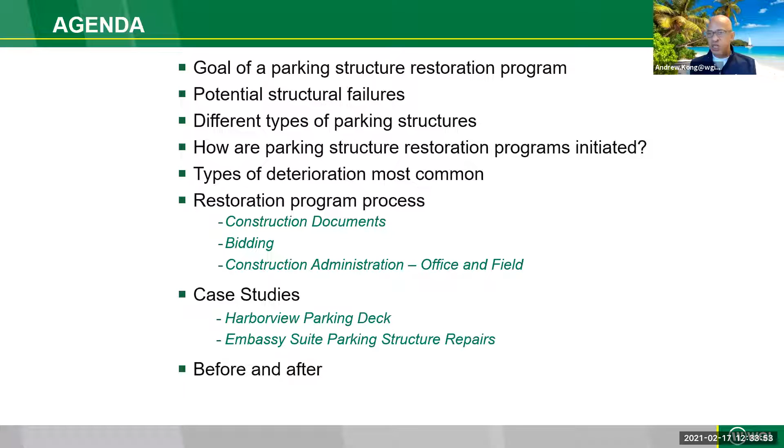We'll talk through a little bit the common types of deterioration that exist in most parking structures when we get involved, what we do from that point in terms of developing a restoration program from construction through administration, and then we'll share a couple case studies to highlight what the process looks like, and then some before and after of different types of repair that we've been involved with. Those before and after may include projects outside of just parking structures.

Again, our main goal here when we do a parking structure restoration program is to make sure the structure remains serviceable. So that's kind of our overall goal. We don't want the structures to get to a point where you're going to have major failure. So that's the whole idea of us getting involved and doing this. The next few slides that Juan is going to talk through will highlight some failures in parking structures that we try to prevent in terms of when we develop our restoration programs.

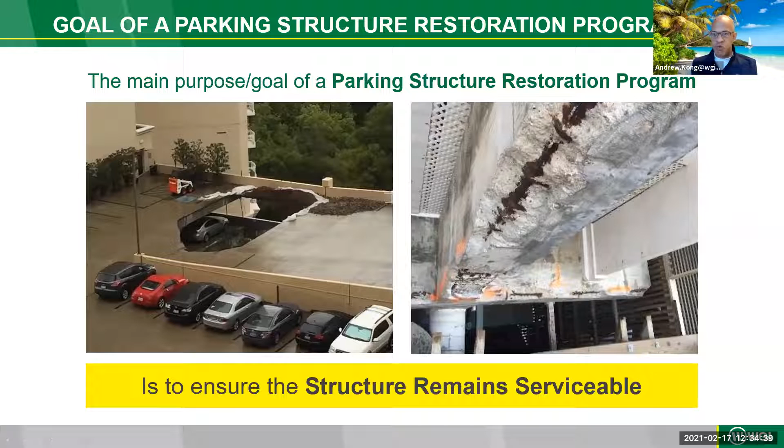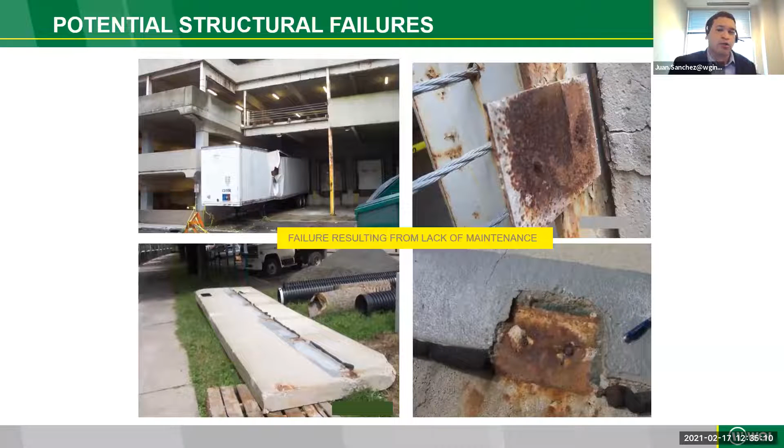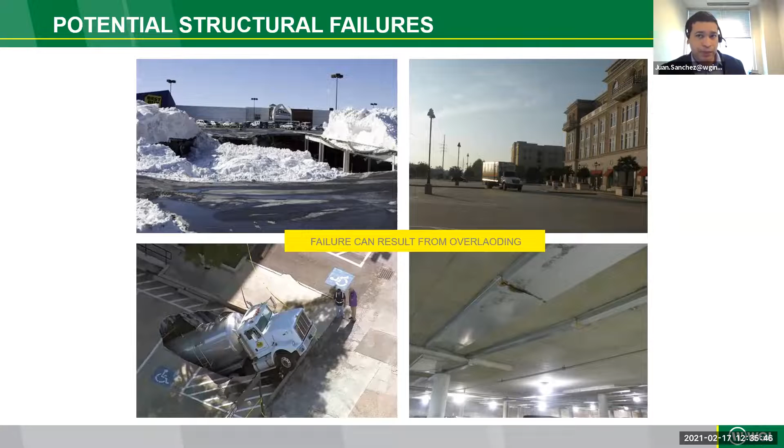We can also have failures resulting from overload in the structure. Again, here we have some extreme examples. The picture on the top left shows accumulated snow, very high, which led to the failure of the structure. On the bottom left, you can see a tanker truck that overloaded a parking structure. The picture on the top right is similar - the structure was being overloaded by a food delivery truck. Again, it's a parking structure.

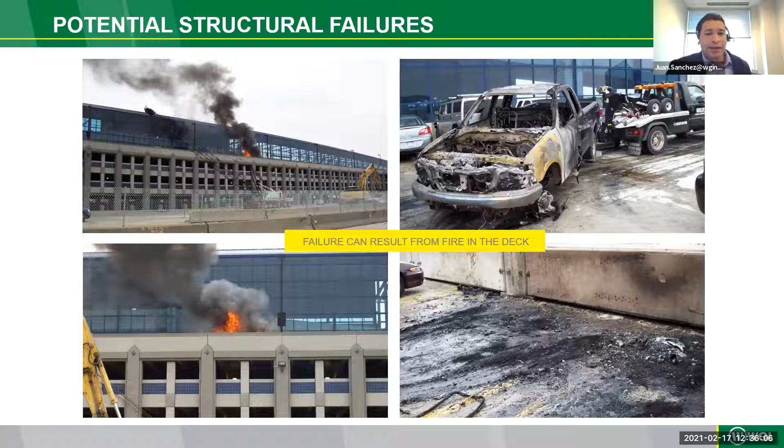Failures can also occur due to fires. Basically, when concrete and steel receive high temperatures, the yield strength of the steel and the compressive strength of the concrete are reduced, and this is an inelastic process. Basically, the reduction in strength is permanent.

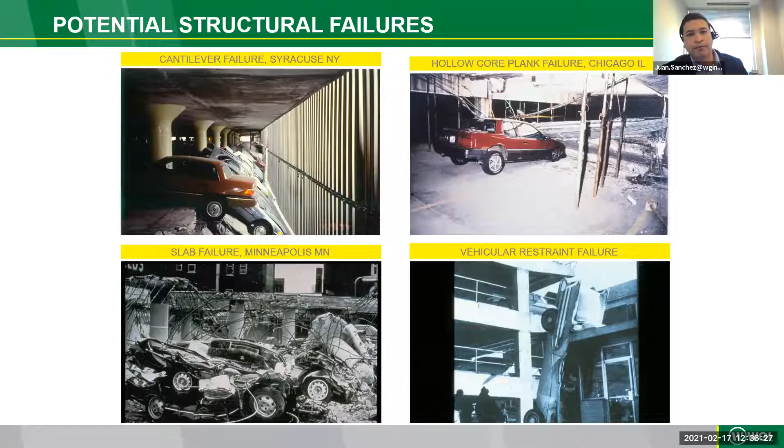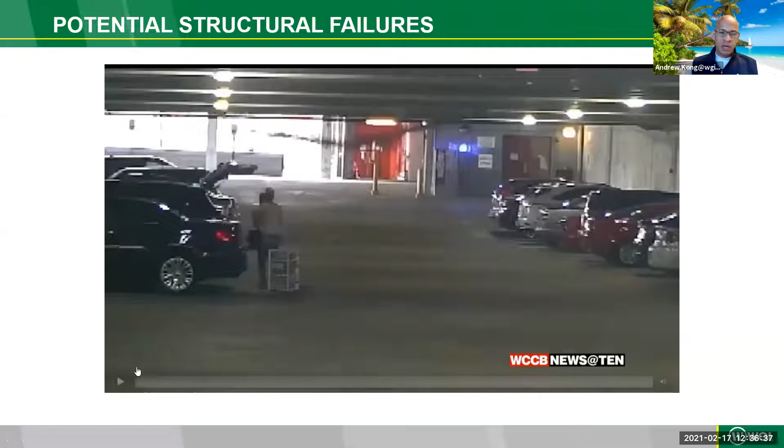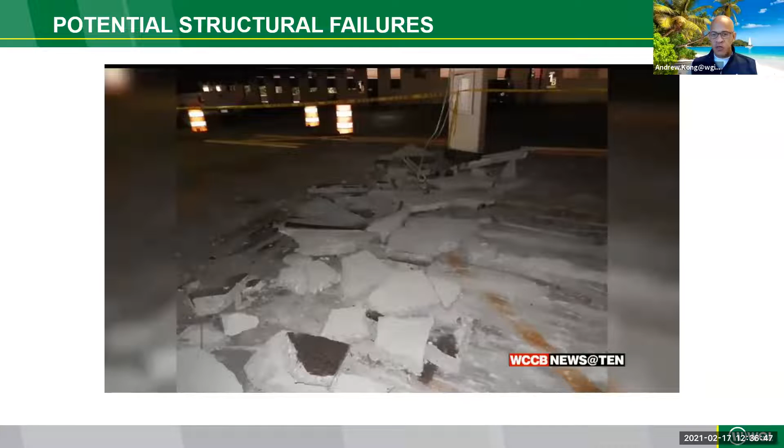Just to continue on some of these extreme failures, and extreme doesn't mean that they likely won't happen. In this scenario, consider standing in a parking deck and the section of the floor falls through right where you are. Those are things that when we go and do these assessments, we're looking for.

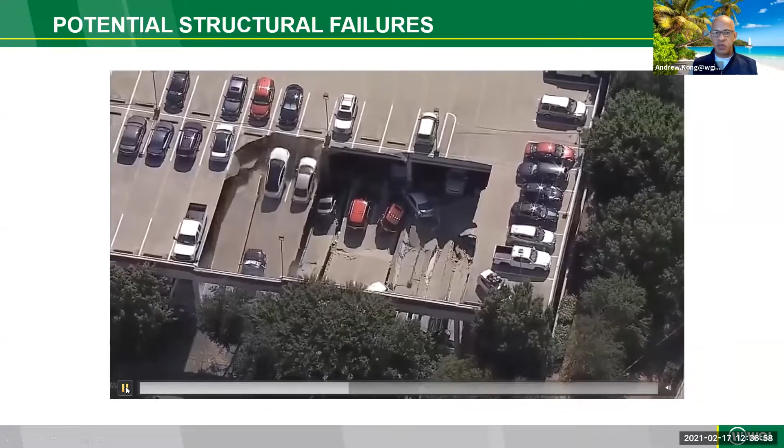Another extreme case here, I think it was 2 years ago in Texas, where this parking structure, you can see, I can't imagine you're sitting in your car and the floor of the garage falls out. I can't imagine. But what it tells us is how much effort and intensity we need when we get into the structure, thinking about what we need to do to make sure we can cover as much as we can to eliminate issues like this from happening.

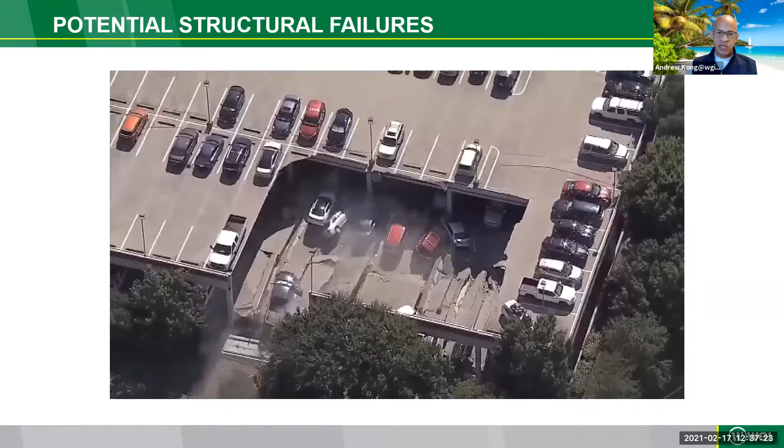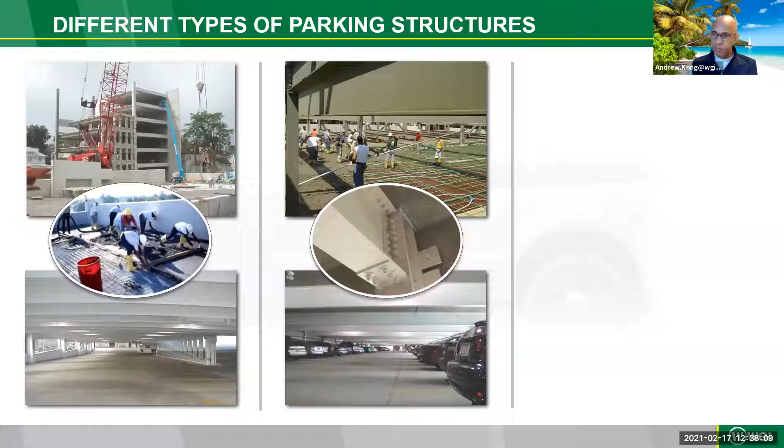The next category are steel parking structures. Beams and columns are made out of steel, but typically the driving surfaces are cast in place, and they could be conventionally reinforced, or they could have a combination of conventionally reinforced and PT cables.

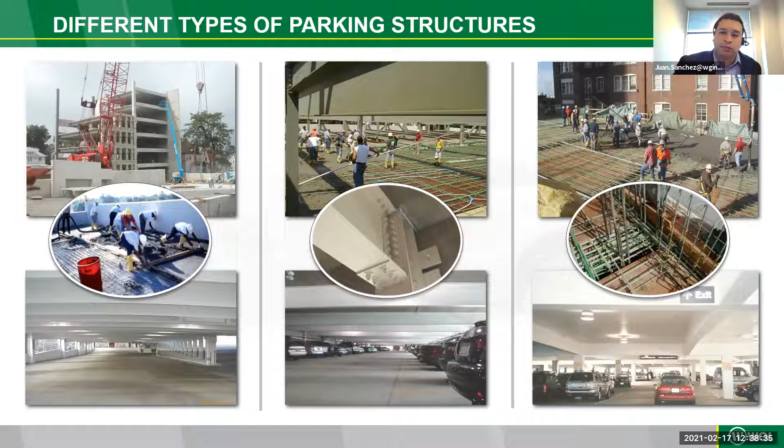The last general category for a parking structure are cast in place parking structures. Some of the older structures are conventionally reinforced, and the newer structures have a combination of conventionally reinforced and post-tension cables on the driving surface.

The main reason we've highlighted the different types of parking structure, as Juan alluded to earlier, is because we want to get to this point: not all parking structures are equal, right? So as they say, unfortunately, you get what you pay for.

In most cases, as Juan alluded to, we have different, common types of parking structures that we deal with. Here we're highlighting some important aspects when you start thinking about designing and implementing a new parking structure. You've got to think about the quality of construction and the maintenance that's required.

Same thing is true in the post-tensioned structure. The initial cost for the structure is much higher, but in terms of maintenance it's much lower, and in terms of life expectancy it's much higher.

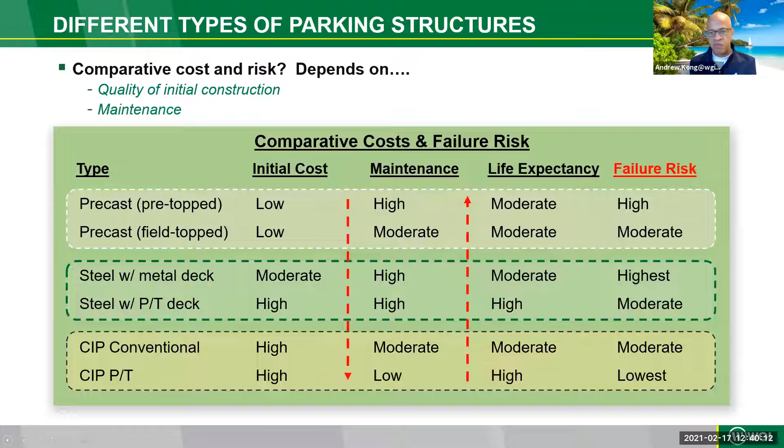That's the key, and unfortunately, a lot of times we'll get into a scenario where folks build the lower end structure, but they don't accommodate enough money for maintenance and understanding what the likely outcome can be if they run into deferred maintenance. This table is just to show you that you spend more upfront in order to spend a little bit less in terms of long-term maintenance of the structure.

So why, how do these parking structure restoration programs get initiated? What we've derived is usually from 3 different scenarios.

A lot of times we'll get called for assisting clients with developing due diligence, whether they're selling or acquiring new properties, or just normal routine for a client that wants to do yearly or typical engineering condition assessments of their structures. The other scenario is when things fall apart in the garage and they have issues, and they call us in to say, hey, we need help with these items. So typically that's where we start a lot of times.

If we develop these reports, or we get called in because there's an issue in the garage, they need assistance with developing a repair program. So the other part of the coin is who should be completing these reviews and inspections. In terms of routine maintenance, that can be done in-house by the client's staff who understands what they're looking at, or by contractors.

But as it pertains to structural and waterproofing, life safety, that should be done by qualified individuals, a firm that has individuals that understand how these structures behave. With parking structures, you can't fix what you don't know how it's developed and how it's going to behave. And if you don't have training and experience in understanding how it was constructed, how it was designed and how it should behave, then it's hard to diagnose the issues and how you address that.

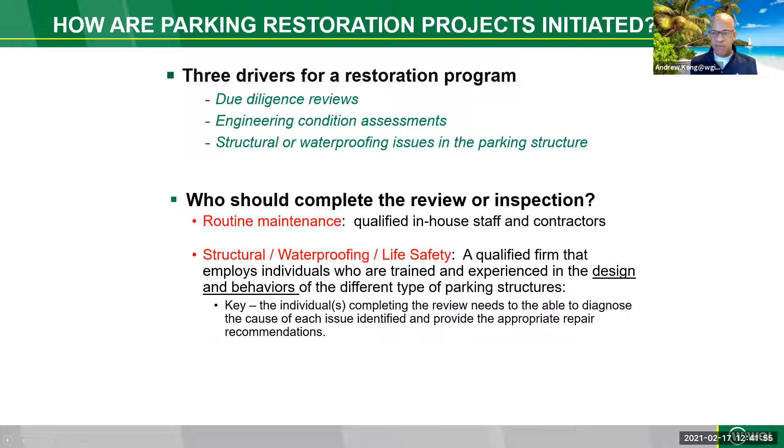So as far as that's concerned, you need individuals that are trained and experienced. When we put together a repair program, it's typically laid out in 4 areas: items that are considered not compliant, code compliant items like ADA guardrails, and then most of the main items we deal with are structural repair items, whether it's concrete, slabs, beams, vehicular guardrails, stuff like that. Then waterproofing items, sealant, deck coating, expansion joints, plaza system, and then a category we separate as miscellaneous. It's not a complete list, but it's how we pocket the different types of items into our repair program.

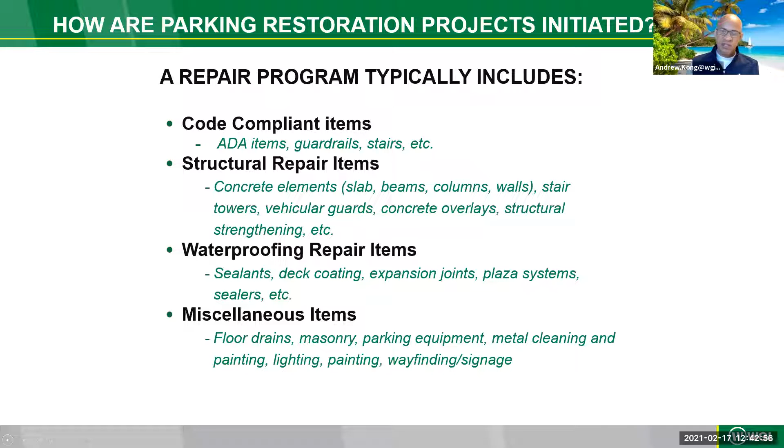So the next step is, Juan will take you through some of the typical deterioration that exists in us developing these programs. Parking structures are typically open or partially open, and therefore exposed to the weather, and this exposure leads to a more rapid rate of deterioration. Some of these pictures are showing that.

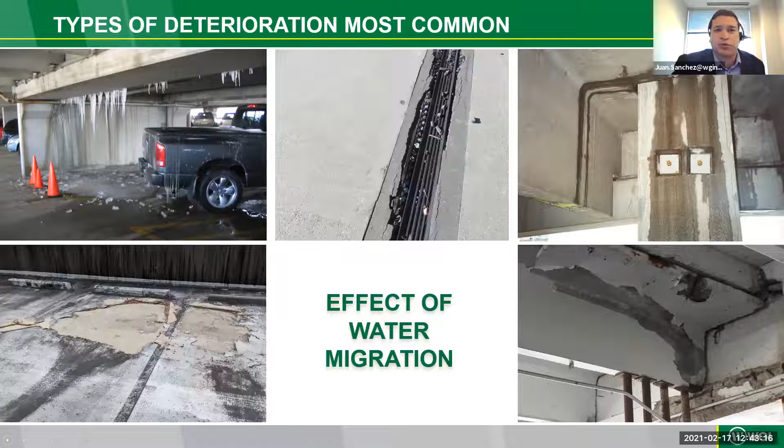Water, sometimes mixed with de-icing salts, gets through cracks in the concrete and reaches the reinforcing steel. The reinforcing steel then expands, and this expansive force spalls the surrounding concrete. Here are some good examples of concrete spalling due to the reinforcing steel expanding and corroding.

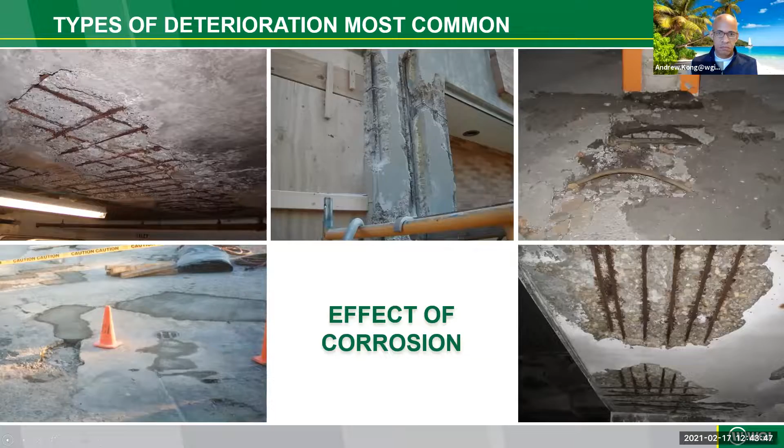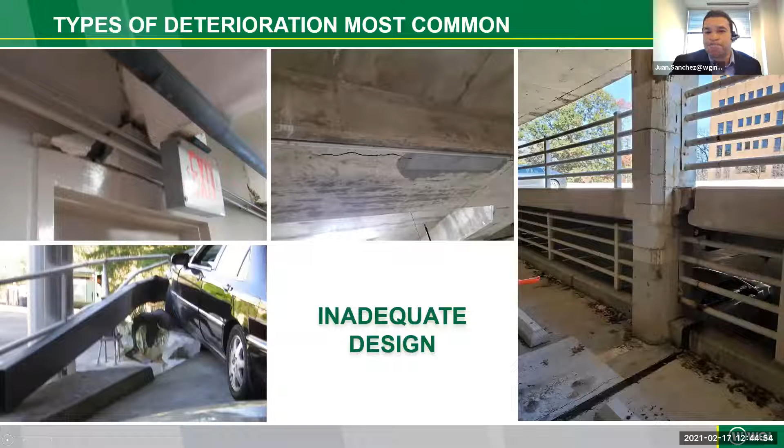All right, so those are some of the common distress that people will see, and again those are not all inclusive. We just identify those because a lot of times those are most common that folks will see in their garage and understand that, hey, we have an issue.

So with that being said, once we get pulled in to determine what's going on with these parking structures, we identify the items that need to be addressed by the client or whoever the stakeholder is. They'll ask us to put together a program to address certain items based on whatever their capital budgets are, and depending on what's considered immediate or long-term.

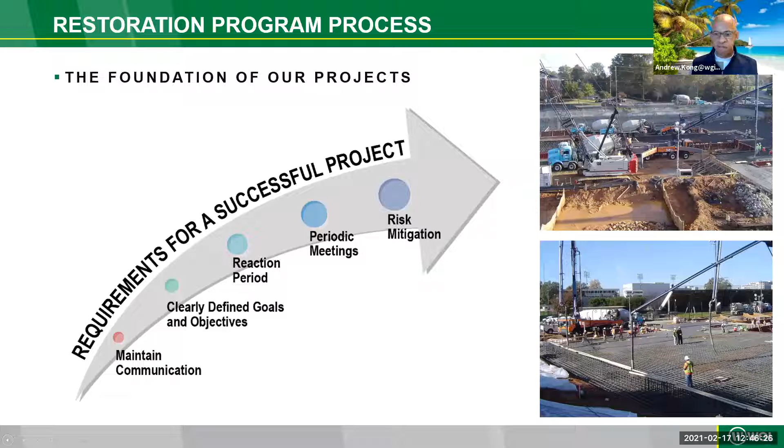Before we even get started, once we get engaged, the first thing we do as a firm is sit down and go through the foundations of what will make our project successful. Here we've highlighted some of the requirements that drive a successful project - key bullet items like maintaining communication, setting clear defined goals and objectives, setting our reaction time, establishing periodic meetings, and figuring how we mitigate the different risks that may be involved in the project, because all these projects are unique and different. No restoration project is ever the same - they may have similar types of repair programs, but they're never the same.

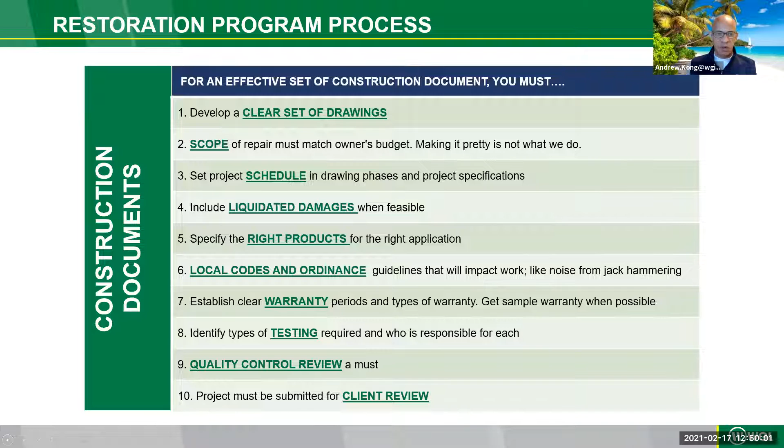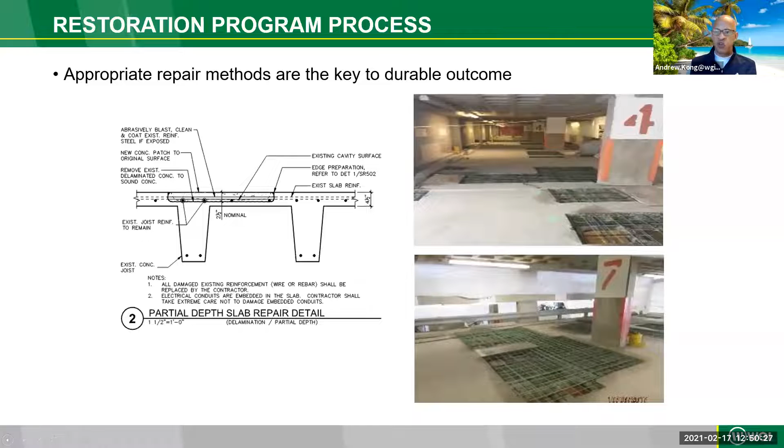And part of having a good set of documents, as they say, the devil is in the detail. So make sure you have the right detail for the right application. Here we're just showing a partial depth slab repair detail, and on the right side we're showing how that's executed, making sure things are square cut, the right reinforcement is going back, the right depth is achieved, because you're trying to establish something in terms of long term.

And then we talk a little bit about phasing. In most parking structures, it's quite rare when you get a large amount of space, because a lot of these structures are revenue generating. So you have a limited number of spaces, whether it's 100 out of 1,000 spaces you got to work with. You have to have a way of telling the contractor how to move around to create a safe environment for them to do the work, and figure out the most efficient way versus their duration. So having a good phasing plan is critical to the outcome of your project.

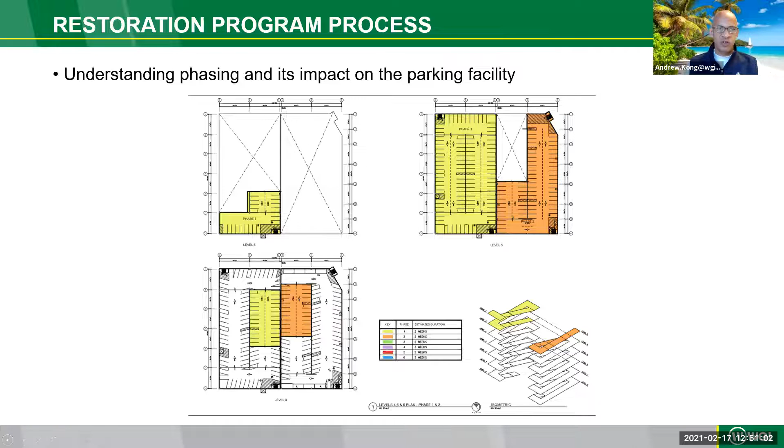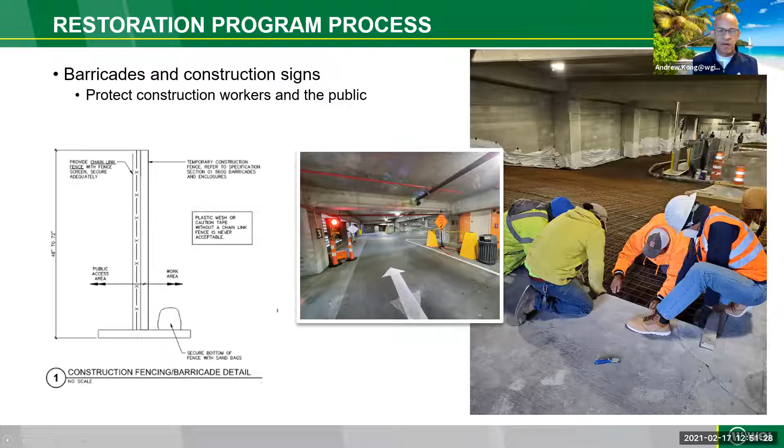And here again, as part of your document, you need to highlight what are the safety constraints. Safety is on the contractor, but you need to define what those minimum requirements at least need to be. So here we have details for how they should set up their barricades. This structure here, we actually have temporary lights in the garage to help with traffic control as part of the barricade and signage.

And so once you've established the construction documents, the next thing is to find qualified contractors. That's the key. So in bidding, you need to make sure that you select the right contractor that understands or has the capability to do that kind of work. On the private side, we have a lot of leverage in doing that. On the public side, not so much. But if you have a good set of documents, the same should apply. Give these contractors enough time to put together a reasonable bid.

So at the end of the day, you get a bid that you can really understand what's being asked or provided. Where possible, have a pre-bid conference, make it mandatory, so you can explain what the expectations are and go over the drawing so everybody can see here's what we're trying to do, here's what we're asking you to do. So there's limited questions.

And at the end of the day, once you get the bids back from the contractors, make sure you create a bid comparison spreadsheet to look at all the numbers in line with each other, to see where there is any deviation, so you can go back and question whether or not a price is too low or too high, to get the mindset of what the contractor is thinking.

Because sometimes people make mistakes. They may assume something that's not really the intent. And make sure the math works out, because sometimes folks are speeding up to get their bids in, and they may miss a number, and you don't want to penalize them for that.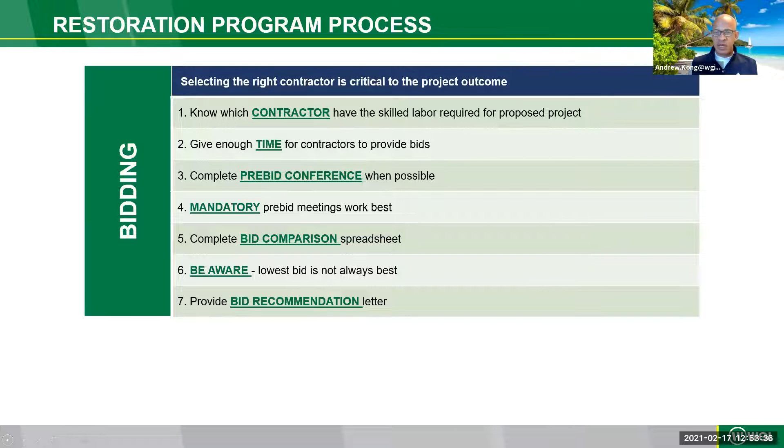And the last piece of a restoration program is the construction administration. I think in my opinion, this is one of the more challenging pieces, because the facility is in service, you're dealing with old structures. Usually there's a lack of existing documents, and there's always unforeseen conditions.

So for a successful construction administration process, your restoration consultant should always have a role in construction administration, should have a heavy role, and should be as involved as possible. Now, there are some limitations, because we need to be aware of the scope and the schedule. Depending on the complexity of the project, there will be a number of site visits. More complicated projects, we need more site visits. Easier projects, not so much.

And then to accomplish this, we need to set the expectations early, have clear communication, and have a pre-construction meeting. Usually I like to set my expectations early by requesting contractors to do mock-ups of all the repair items. And then that way we can agree to an acceptable criteria.

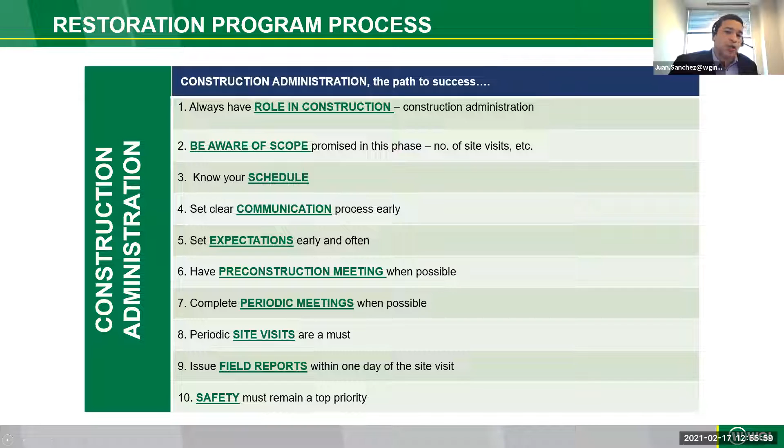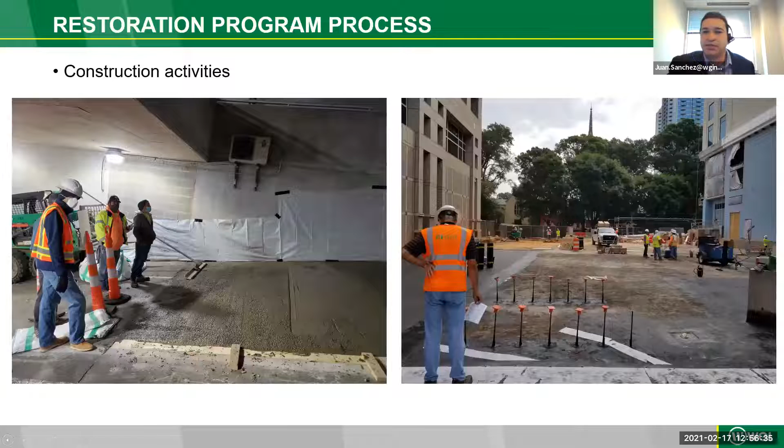We're also there making sure that we can answer questions, checking elevation, dictating where tool joints go. We do have, there's usually a special inspector involved that works for the owner, but they have a different role. We're just there to kind of answer questions and make sure that things go according to our contract documents.

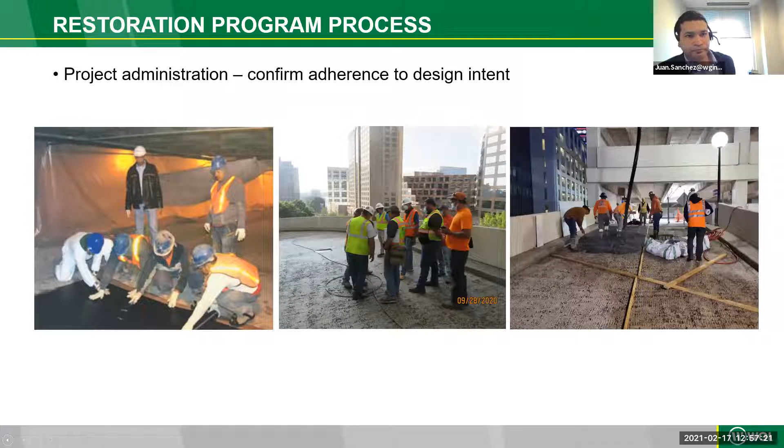And then now I'm going to do a small case study for one specific issue. So this is Harborview parking structure. This was constructed in 1980. It's a field topped precast parking deck. It has 5 levels. We were tasked by the owner to retrofit the vehicular and the pedestrian guardrails. There were some other miscellaneous items that we worked on. One of the major constraints was that the structure was in service during the repair process.

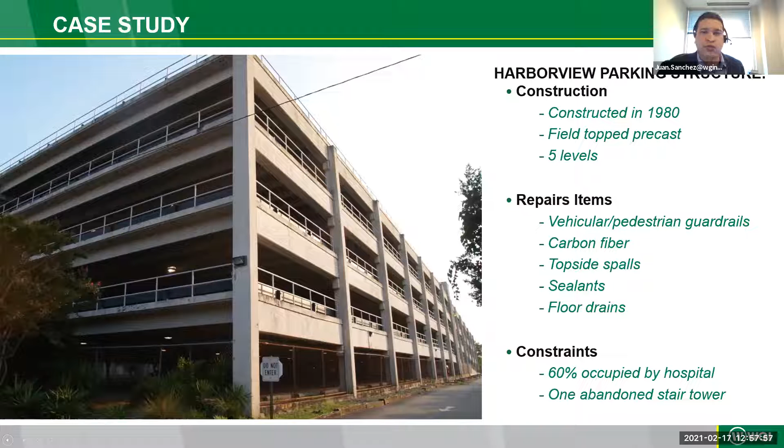So as I mentioned earlier, we were tasked to retrofit the existing guardrail system. You can see the existing system in these pictures. Initially the system looks very robust, but looks can be deceiving.

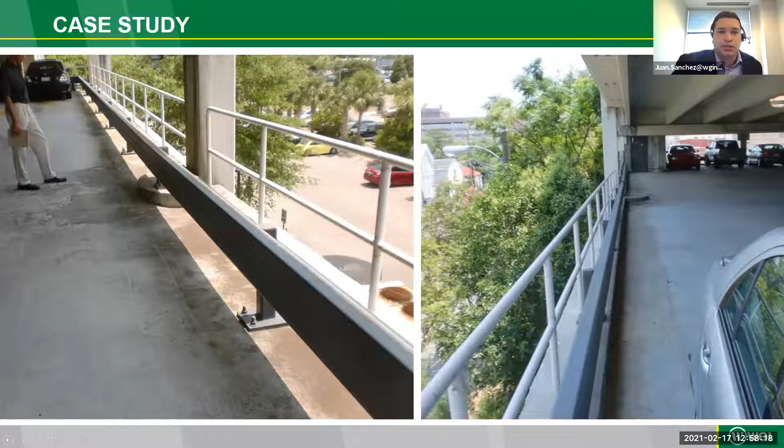On the next picture, case in point, the guardrail was tested. One of the patrons in the garage suffered a heart attack and hit the accelerator instead of the brake, putting the guardrail to the test. As you can see, although the guardrail stopped the car from falling off the structure, it did a poor job and did not act as it should have, as intended or as required.

If you go back to the previous slide, you can see the failure happened at the edge, and you can't see any type of reinforcement tying the curb back to the double T's. It was almost like a clean cut.

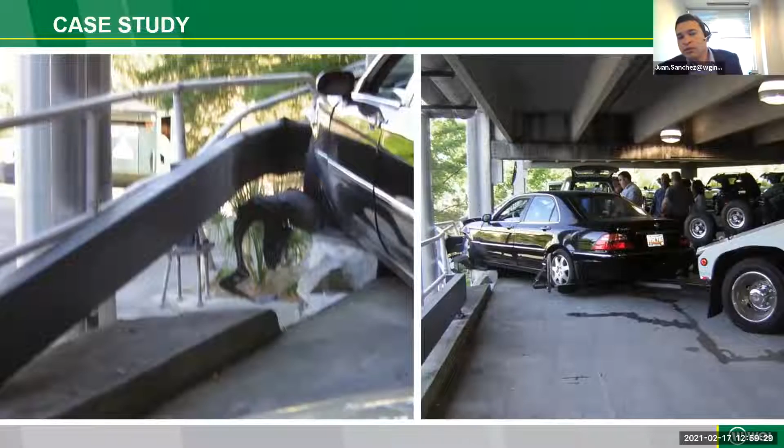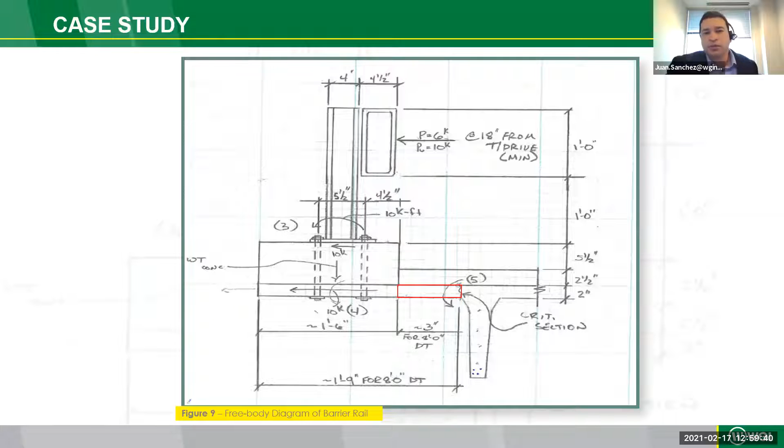So during the retrofit, this is one simple detail, but there's different ways of addressing this. Our goal was to complete the load path, so we transferred the loads through a series of plates and brackets from the barrier above to the double T's.

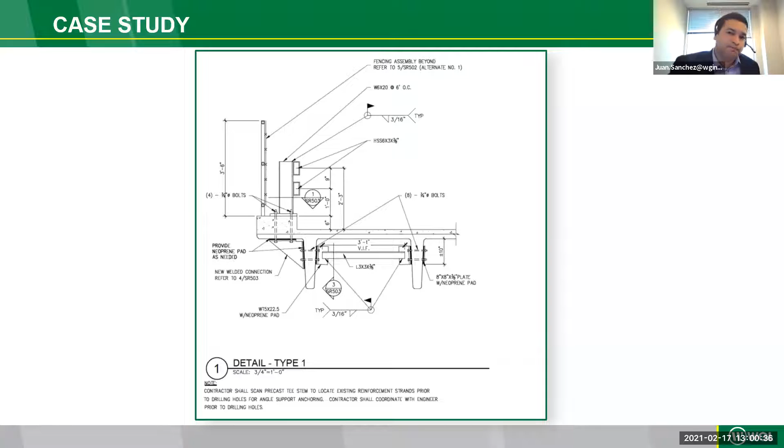Some of the challenge is, for example, these double T's have cables, so you need a qualified firm or qualified individuals that can assist the contractor and tell them where there's no cables so you can drill. You need a qualified firm that has expertise in precast structures, steel elements, and carbon fiber repairs.

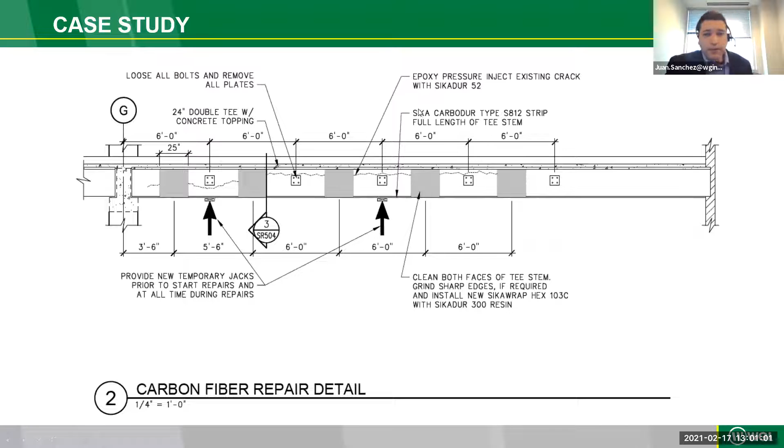If you look at this next slide, the double T's were damaged during the accident, so we had to epoxy inject the cracks and strengthen the double T's with carbon fiber. The gray hatches you see are the carbon fiber reinforcement. On the bottom, it's kind of hard to see, but there are carbon fiber plates also used to strengthen the double T's in flexure.

Here's an after picture. On the left you can see the carbon fiber, the black elements wrapping around the double T's. You can barely see any cracks because we epoxy injected those. On the bottom it's a little hard to see, but there's the carbon fiber plates to strengthen the T's for flexure, and the new brackets that were put in.

We had to check the double T's for punching shear. This was a bit of a challenge because there weren't any existing drawings, so we had to rely on our experience to check the double T's. In the picture on the right, you can see the new pedestrian black railing and the new vehicular rail that we put in at all levels of the parking deck.

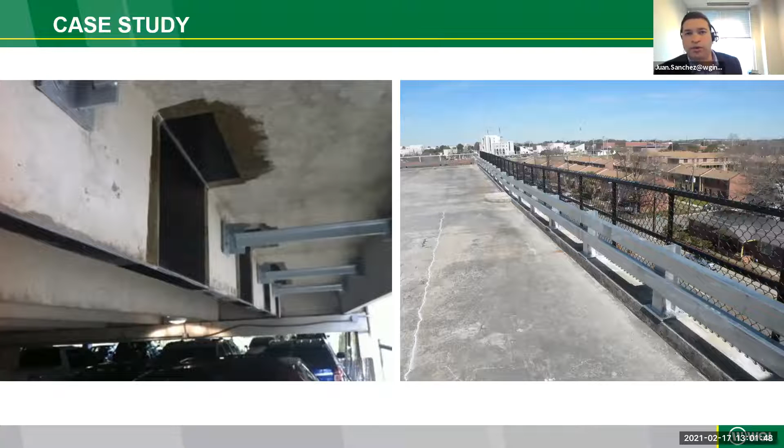Okay, so that's the first case study, and the goal here is to highlight the complexity of parking structures. For folks who design, repair, or work in parking structures, we know they can be very complicated. So the thought we came up with when we talked about the previous case study that Juan highlighted is, let's talk about a deck that's above grade.

Let's talk about a deck that's precast, and the different elements. So Juan just talked through an above grade precast parking structure. Now we want to talk about a below grade, subterranean parking structure that's below a hotel.

So we're looking here at the Embassy Suites parking deck. You can see the structure was constructed in the 60s and conventionally reinforced. We have 4 levels. So here you're in a large city with tight constrained spaces, and you have 4 levels of heavily deteriorated parking structure below 28 floors of hotel.

And what this goes back to is, before we started talking about the construction documents, we really talked about the foundation of what makes our project successful. And these projects are the ones that really drive that home.

We have an active hotel with 28 floors above a structure that's heavily deteriorated. How are we going to make sure we implement a repair system that's going to create the least inconvenience to the folks occupying the hotel, and what's going to be the most structurally sound type of repair? So we just couldn't go in and demo concrete willy-nilly. It just wouldn't work. We couldn't use jackhammers because the vibration and the noise would just be hell for the guests to pay.

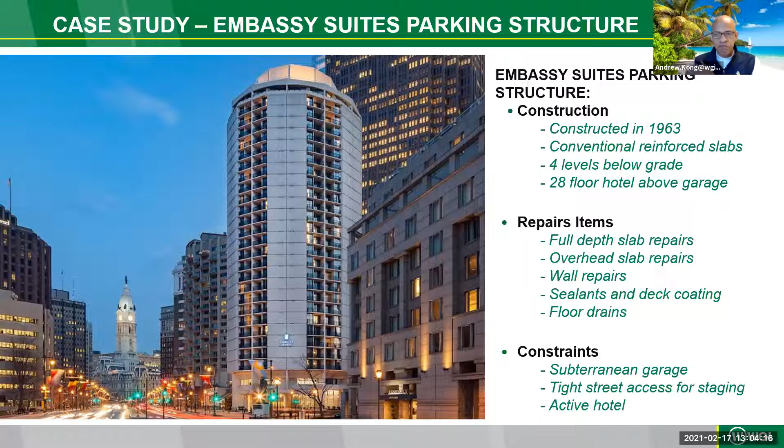Here we're just looking at some of the different types of distress. This garage, again, deferred maintenance has put it in a position where things were, actually, to a point where you're like, oh my goodness, it's hard to see myself parking in that garage. The floors, the concrete, you can take up with your hands. The level of section loss was so extensive.

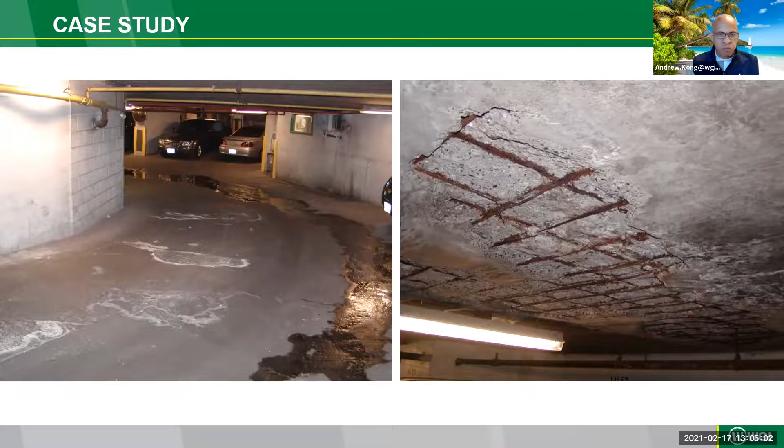But that's what we do. We go in, we were called in to investigate these issues and figure out a way to get them addressed while keeping the facilities in service. Our thought here is, what do we do? How do we fix this, and what's going to be the process? So what we ended up doing here is we decided we can't jackhammer.

It's going to be too much noise. So we implemented going with Hydro Demolition. In the Hydro process, you're using high water pressure to cut the concrete. You put high water pressure on, push it up close to whatever the compressive strength of the concrete is, and all the bad concrete, it takes up all the bad stuff.

The bad part about that is when you're using all that water, and because our garage is going 4 levels below grade, everything is running down, so how do you capture the water? Because of the requirements by the city, we had a vacuum truck tied to the Hydro Demolition machine that sucks up the slurry, because we just could not capture it on the deck and put it into a landfill. It had to be sent to a specialized location because of the contamination.

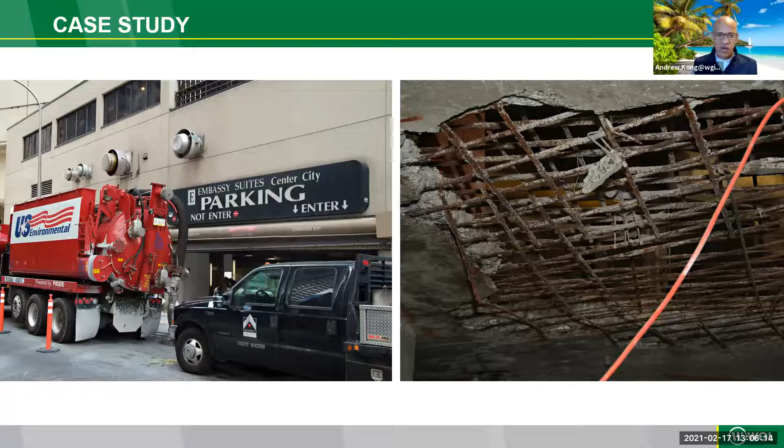So what you're looking at on the left is a vacuum truck that is sucking up all that slurry being produced by the Hydro Dem machine, and then that's taken to an off-site location where it can be safely disposed of. On the right you can see the machine cutting, and right behind it is the hose attachment to the truck that's sucking up as much of that disposed material as possible. But you can only capture so much.

So what happens with the water? Now, because we're 4 levels below grade, how do we get the waste and the water that's being produced, and how do we dispose of that safely? One thing that's typical for most hydro type repair approaches is you have to capture that water, treat the slurry that's being produced, and test it for the adequate pH levels.

So what we did is we constructed these containers in the lower level of the structure, at the lowest level on grade, because it's going to be a lot of weight. We captured all that slurry as much as possible in those containment tanks, the sediment settles, and the water at the top goes into the other tank, and then it's tested for the level of pH, and then it's pumped into the pump room down there and pumped up to the city main so we can adequately dispose of it.

These projects are very complicated because you have a lot of moving parts. The hotel, the core of the hotel, where the garage surrounded an active area for laundry and all that stuff. So we had to make paths for folks going in and out, and paths for how they dispose of their garbage from the hotel. On a few occasions, sprinkler pipes were knocked off because it's a sprinklered garage, and then the fire department shows up and you empty the hotel.

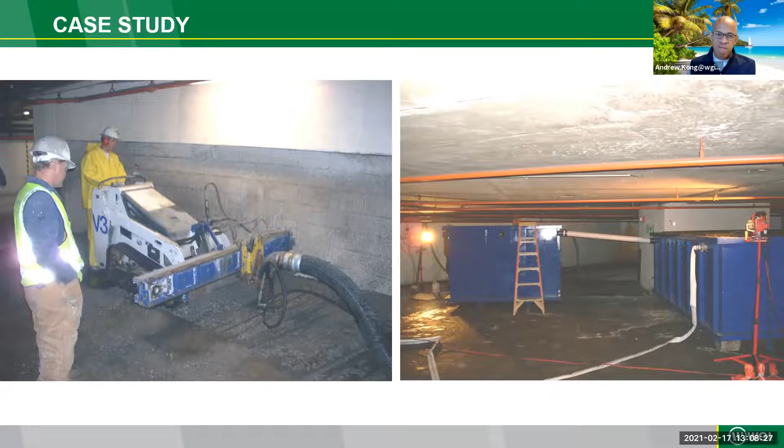Now you're looking at the extent of bad concrete that has been removed. You see these big holes in the floor. We had shoring underneath because the core, the entire slab itself is tied in as part of the core and is part of the entire structure. So we had to be very careful about the limits of what we can remove at any given time in the garage, and make sure things are adequately braced and shored.

Because the concrete is so bad, once they shot blast, it just comes up. You can see on the left, we have some small pieces of concrete left in place. Usually at the end, we just go and knock out all that bad stuff because it does us no good. Then on the right, we go back forming the entire thing and embedding into the existing structure, and we go back with epoxy coated rebars.

Even with the simple thinking of using epoxy coated rebar, we have to be careful, because when you cut those rebars, you've got to make sure you treat the ends and stuff like that. So there's a lot of design. We couldn't just throw back bars to match bars. We had to make sure we do some analysis in terms of figuring out how much reinforcement needs to be replaced versus how much reinforcement we've lost.

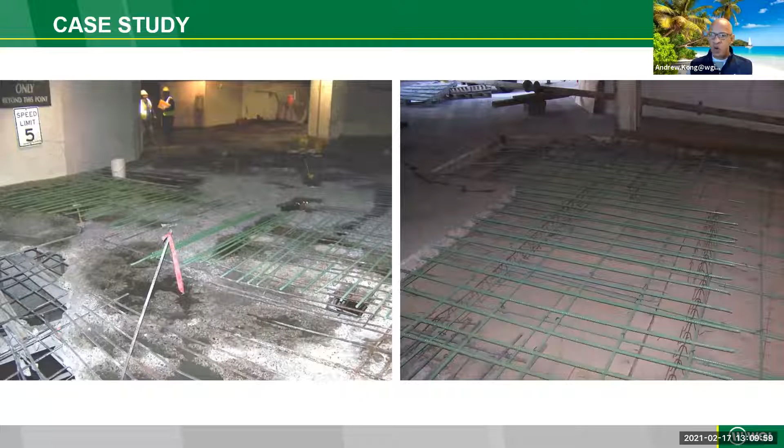These repair programs can be very complicated, and a lot of times from the outside, folks don't really see that in terms of the engineering. The contractors, most of them, know because they've done this many times, what the expectations are when you get into these complicated projects.

And at the end, this is what it looks like. It turned out to be a very successful project, and created a safe environment. Before, it was like, you wouldn't want to park there, but this is what we do.

A lot of times we get called in for scenarios where it's hard to just get somebody to go in there and willy-nilly try to patch here and there. But at the end of the day, a big part of why we get to where we get to is deferred maintenance, where enough money is not allocated by the asset owner or whoever's managing the asset to address some of these issues before they get to this point. If you don't spend and address the issue, then it's going to be cumulative, and the scale is going to go pretty high.

So we've kind of showcased this, and again, our goal here is just to give you a snippet of how we think about what we do and how we do what we do. We can spend hours and hours talking through the nuances and the different types of what we do, but hopefully this gives you an idea.

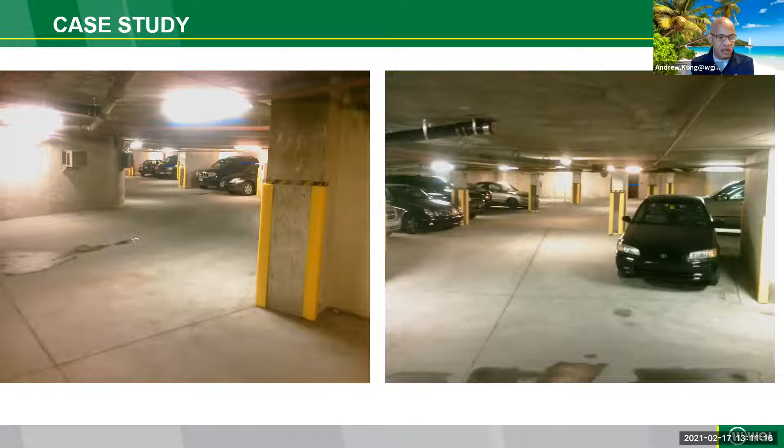So the next set of slides are just some before and afters, highlighting segments of different parts of different projects, just to give you a flavor for how things move from being distressed to a part where you address it.

Here on the left, those two photos show the existing condition of the garage, and we were going to put a silane, a penetrating sealer, which penetrates the top of the concrete to help keep water and moisture away from the reinforcement. You can see the middle photos, that's where the shot blasting happened. You can see the difference with the cleaning, how nice it looks, opening up the pores so they can put a sealer on and then replace all the sealants, and it turned out real nice. So that's just a sealer application there.

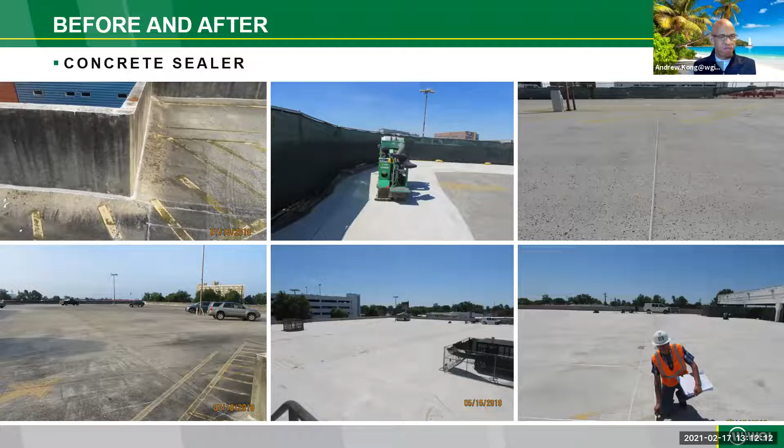Here we're trying to highlight some of the uniqueness of how we think about these items. In the middle photo there's a metal plate separating two garages that we combined into one functionally. They were independently functioning garages, and we functioned them as one, but that plate kept moving all over the place. So we reprofiled that, and on the right you can see we put in a nice wing seal expansion joint that creates a transition to slow folks down and keeps water from sitting and running through the joint.

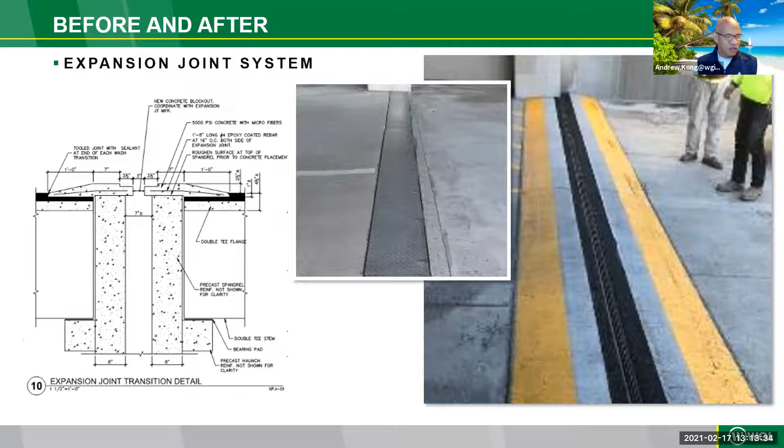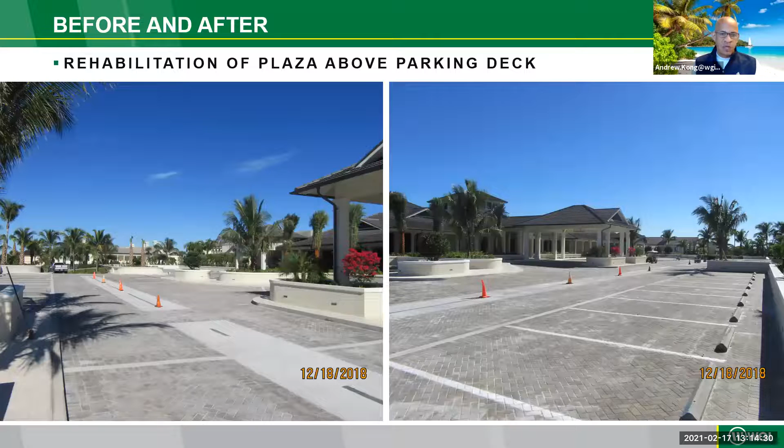The devil is in the detail in terms of what we do and how we do it. Here is a full built-up plaza system that we put in, and that's how it looks at the end of the day. The client is still pretty happy, and it's working fairly well.

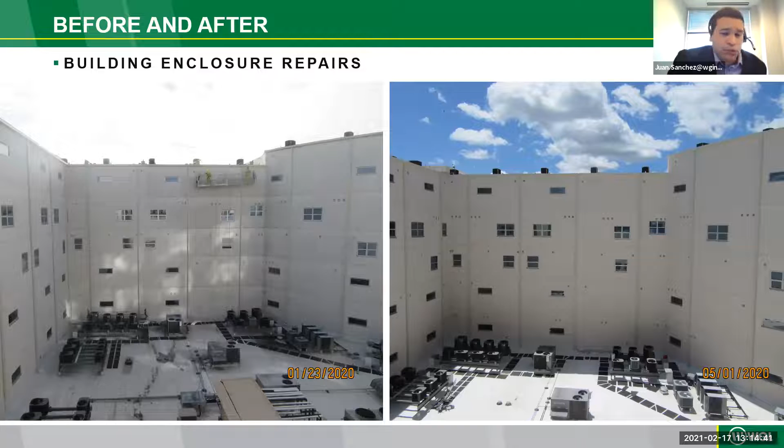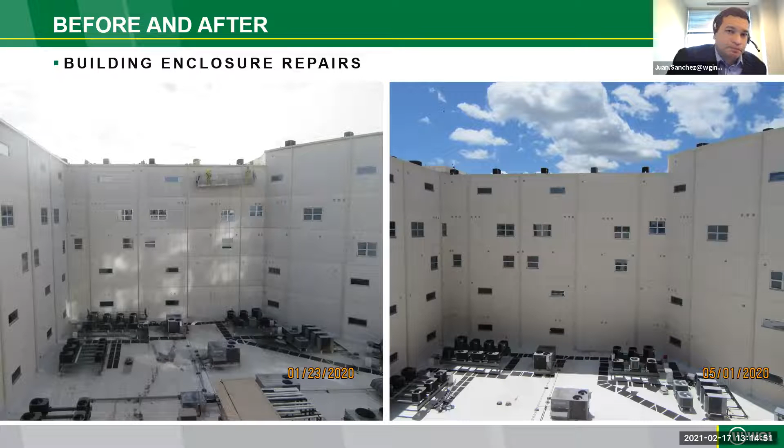Here we have more before and after examples. Again, we don't just do parking structures. We were tasked with cleaning and applying an acrylic sealer on the stucco throughout this building complex. You can see the before picture on the left and the after picture on the right.

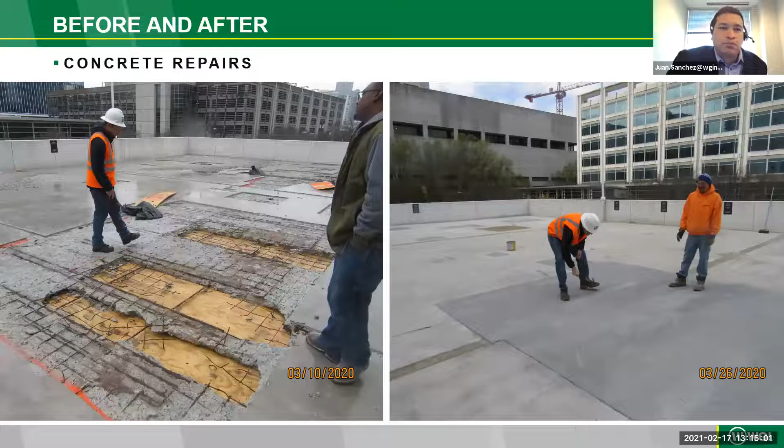Now I'm going to show you some before and after for structural repairs. Picture on the left, there are several levels of parking underneath that repair. The existing reinforcement was in bad shape—you could bend it with your hand. We had to reverse engineer and figure out what was needed, replace the reinforcement, and the picture on the right shows the concrete repair once it was done. You can see Attila hammer sounding the concrete repair to make sure it was adequately done.

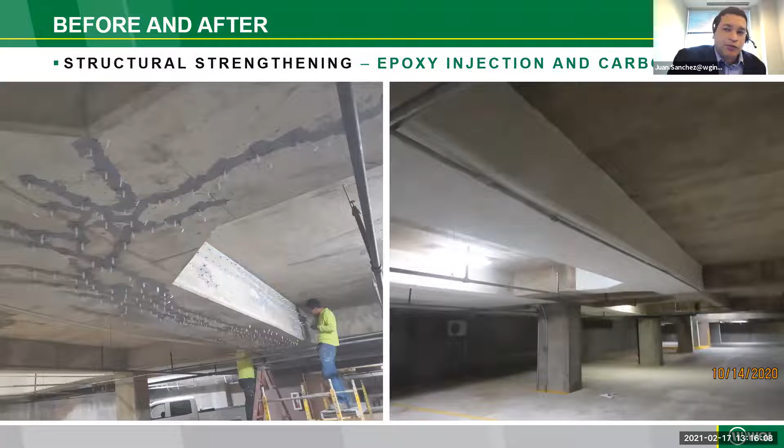Here we have a PT beam that was inadequately designed and had a lot of distress cracks. We did an analysis on the beam, then epoxy injected the cracks. You can see all the ports where we injected the epoxy, then strengthened the beam with carbon fiber wrap and carbon fiber plates. On the picture on the right, it's hard to see the carbon fiber because it was coated, but many layers of carbon fiber and carbon fiber plates were used—you can barely see the repairs.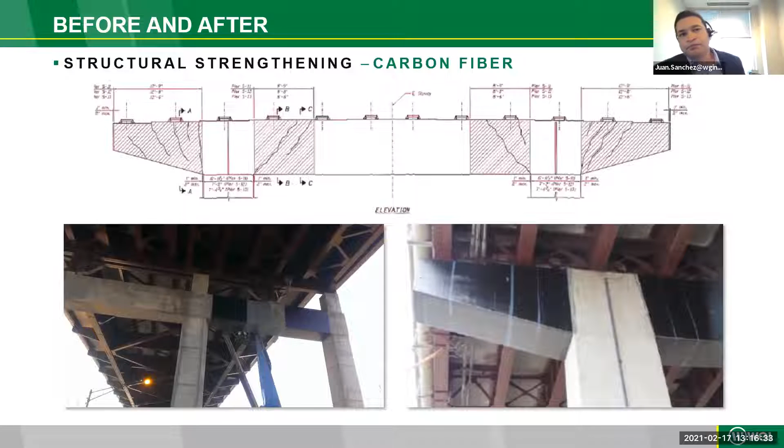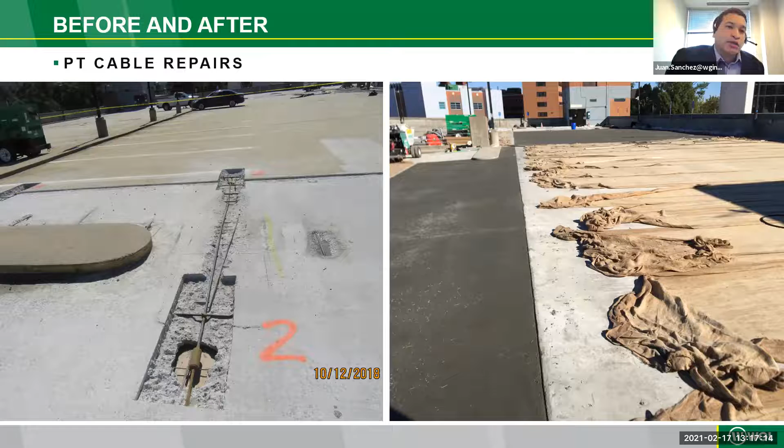Here's a project where we did some PT repairs. The PT cables had a very shallow cover, so a lot of them were damaged, and we had to splice them. You can see the splice on the picture on the left, on the bottom, adding a new piece of cable, and on the top of that picture we put a dog bone splice where we could retension the cables. Another thing we did is remove 1 inch of the existing slab to put back 2.5 inches of microsilica overlay, providing the adequate cover that was lacking in the deck. It was a big challenge just to remove that 1 inch of concrete.

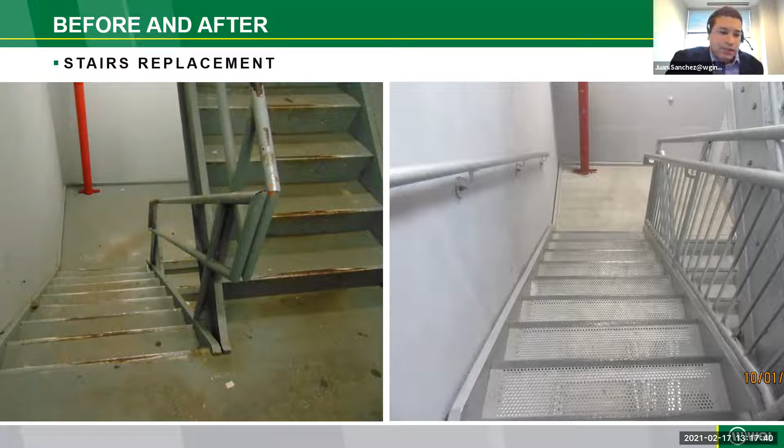We also deal with a lot of steel structures. Picture on the left is the before picture of a stair; the picture on the right shows we completely replaced it. We put in a stair that was code compliant, using a system with a specialized material that makes it slip resistant. We can also repair stairs.

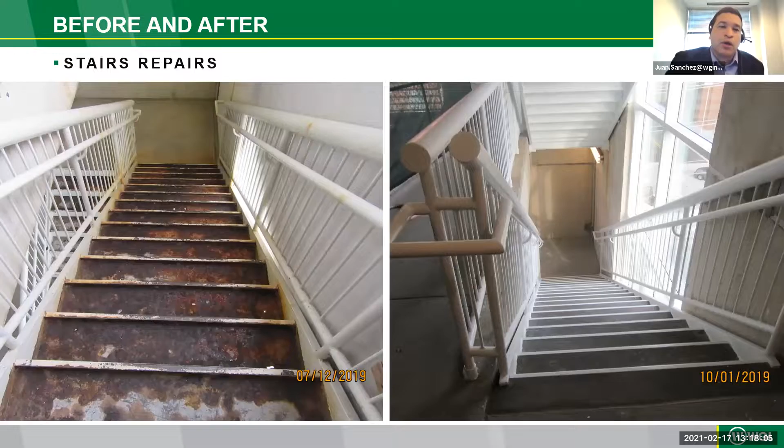In the picture on the left, the treads and risers were heavily corroded, so we decided to remove them and put in a new tread and riser system with concrete. In the picture on the right, you can barely see that any repairs were done. We also enclosed some of the stair tower with a new storefront to help keep water out from the stairs.

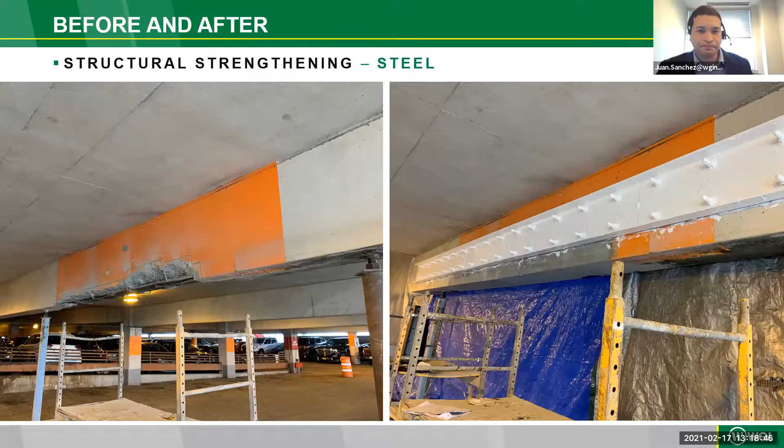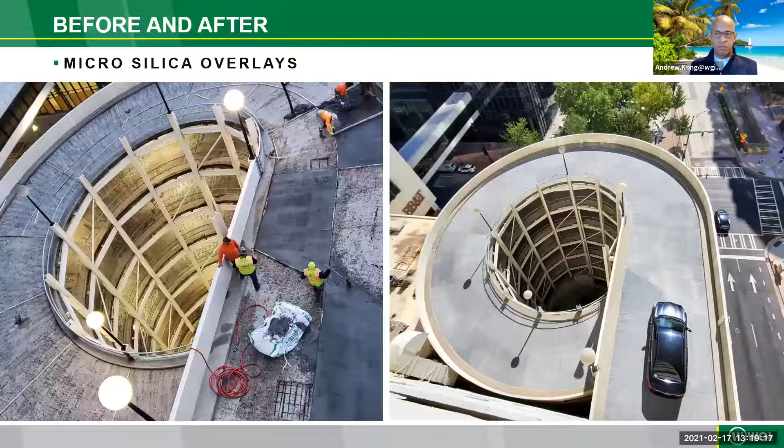Here, the picture on the left is the exit. It's a double helix for a parking deck. The top of the helix was in bad shape, so we decided to install a microsilica overlay on top of it. Some of the challenges were forming the helix and dealing with the locations of the tooled joints. You can see in the picture on the right how the end product turned out.

So that's really what we wanted to showcase today, how we go about and get involved in these parking structure projects, how we think through our approach, and how we help different stakeholders with developing these programs and what the outcomes are. Hopefully you found some of the information useful, and at this point we'll open it up for questions.

I think, Cole, you're checking for any questions. Yes, all right, here we are, gentlemen. Thank you for the presentation. Here's one from Scott Woodworth: what is the average lifespan of precast, steel, and CIP parking structures with and without a maintenance program? What's the life expectancy of a precast parking structure, precast, steel, and CIP?